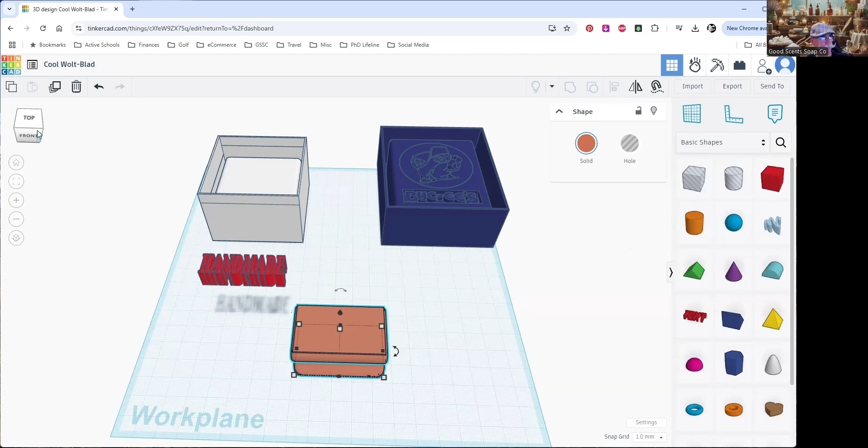So again, we're going to focus on soap stamp making today. So I'm going to start off with how do I make a soap stamp. I'm going to go ahead and share my screen through my Tinkercad application. And here, this is one of my soap stamp designs, and we're going to talk about others. But this is just a simple, kind of a handheld single piece soap stamp, with a flat bottom and top. We'll talk more about that here in just a minute.

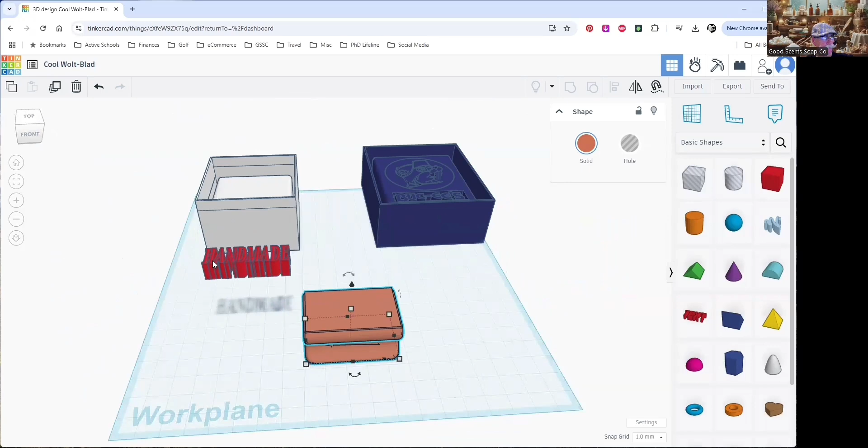But the one I'm going to make right now is one that I want to make for my own soaps. And what I'm going to do is I'm going to say handmade by Good Scents Soap Co. So we're going to make this a little smaller so that it will fit on the face of the soap, like so. And then we're going to have to make it a little smaller so that it will go down into the soap.

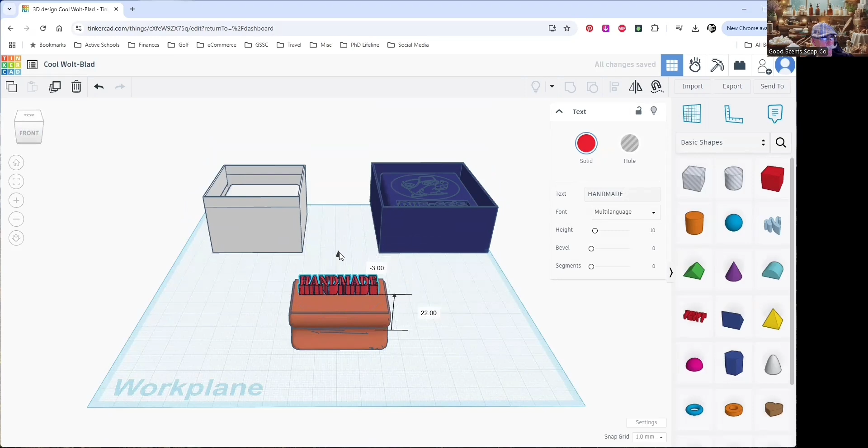So let's make that 5 millimeters. And then we're going to make it go down a bit into the soap, like that. That will leave about 3 millimeters above the soap for the stamp. It can be more than that, it can be less than that, but you want to make sure that it's the right height to be able to get into the soap. I'm going to move that up just a little bit. We'll fix that later. And then I'm going to replicate it.

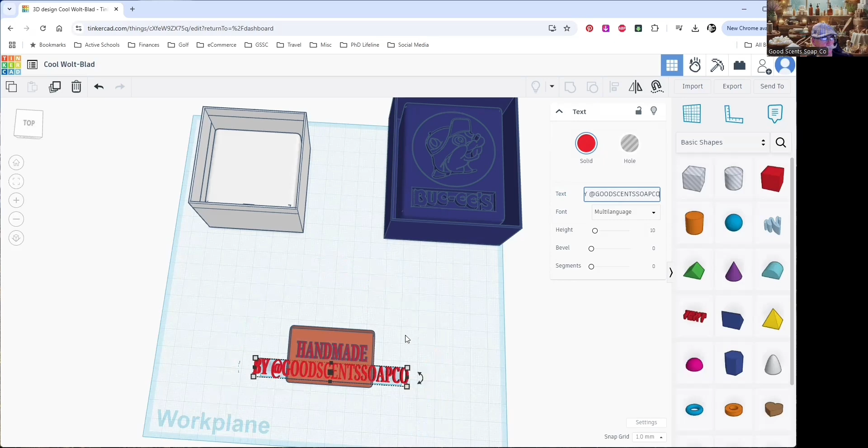So I'm going to do Control D, and it's going to give us a copy of it. I'm going to move that down like that. Then I'm going to go over here, and I'm going to say by. I'm going to use the @ sign. And this is where I'm not sure if it will all fit. So that's basically how you make the text. Now the question is, if I really make that small, is that going to be too small for soap making?

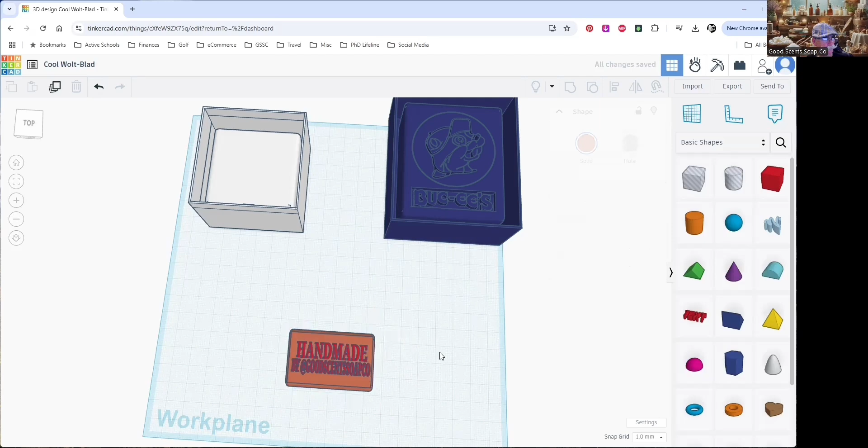That's basically how it is. I'm going to take the soap stamp out for now, and we're going to create a little space like that. And actually, I think if we get rid of that by, it will create more space. There we go. And maybe we can even make that a little bigger, like that.

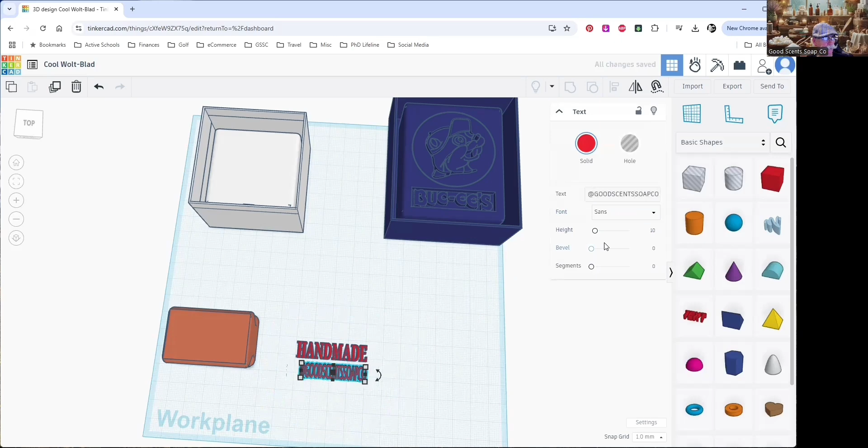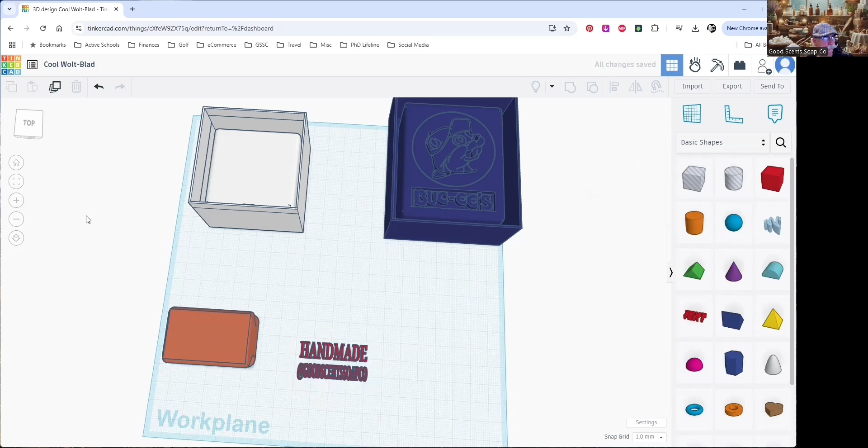The other thing that we can do is we can make these a different font. This is this multi-language font. I think if we make it a Sans Mono is a little compressed. Sans serif might be good. And then if we do this serif, I'm sorry. And then I can select both of those. I can center them together like that. Make sure that they're about at the same height, which they should be, yes.

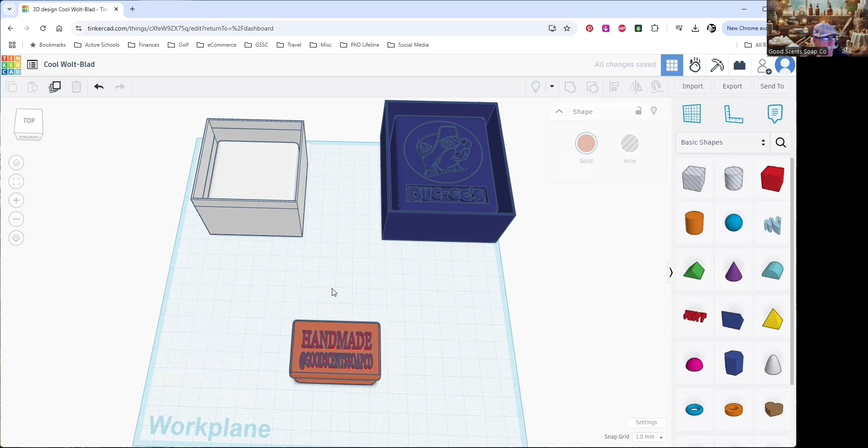Okay, then I can bring them back onto the stamp. And actually, let me do this first. I'm going to merge these. Then I'm going to bring them back onto the stamp. And then I'm going to pick them all, and then we're going to center it on the stamp like that. And then I can merge all of that. All right. So that looks pretty good, doesn't it? There's only one problem.

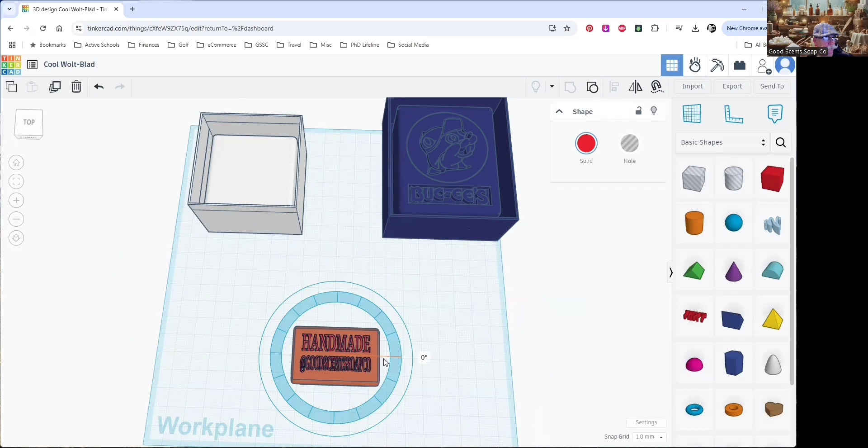There's only one problem, and that is that "handmade" needs to be reversed because we are stamping down. It's actually got to be the reverse of what it will be on the soap. So what we have to do there is flip it like that, 180 degrees. There we go.

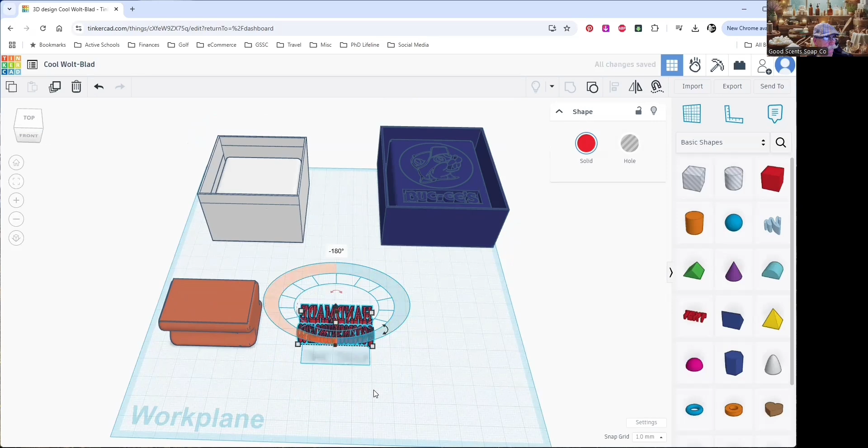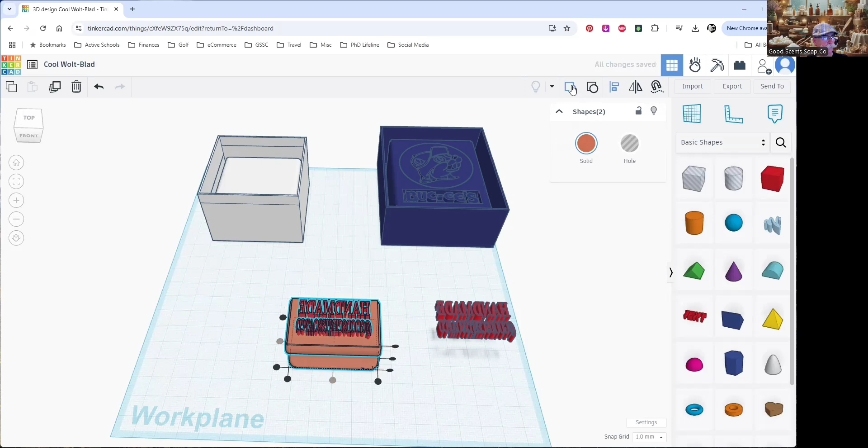And I'm going to copy this, and I'll show you why here in just a minute. We'll move this back. We'll recenter it. Align it. All right. And that's our soap stamp.

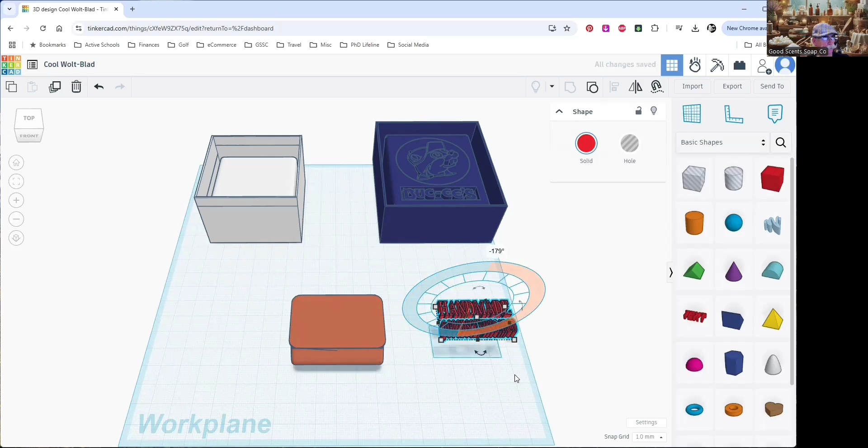So now what we can do is flip this around 180 degrees again. If you notice on a lot of stamps, they say what's on the stamp on the top of the stamp. So we're going to do the same thing. So let's move this over here. Move it up just a tad.

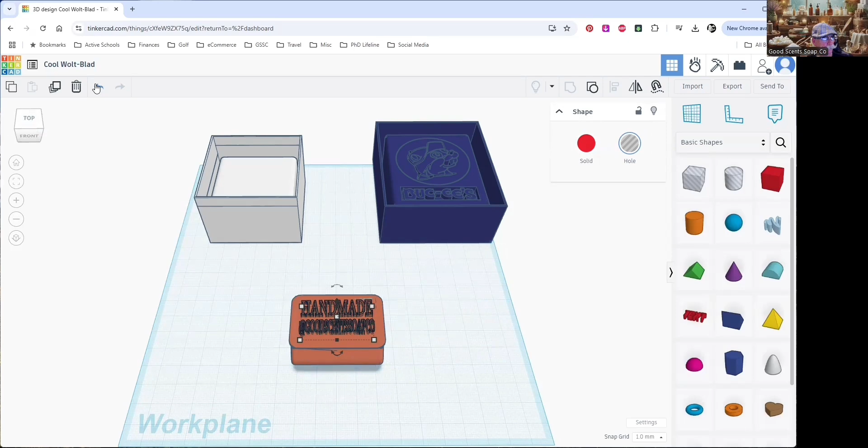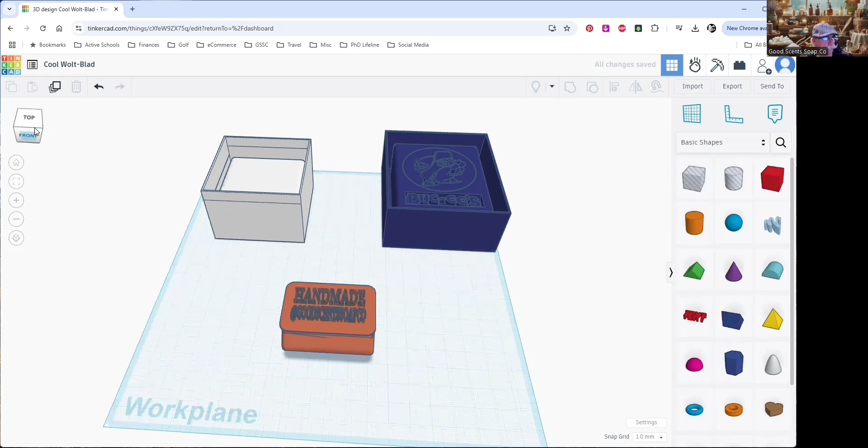And now what I'm going to do is make that a hole instead of a solid. Put it back here. Center them. And this time it's right side up so you can read them. And then rather than it being raised, we're going to lower it into the soap like that.

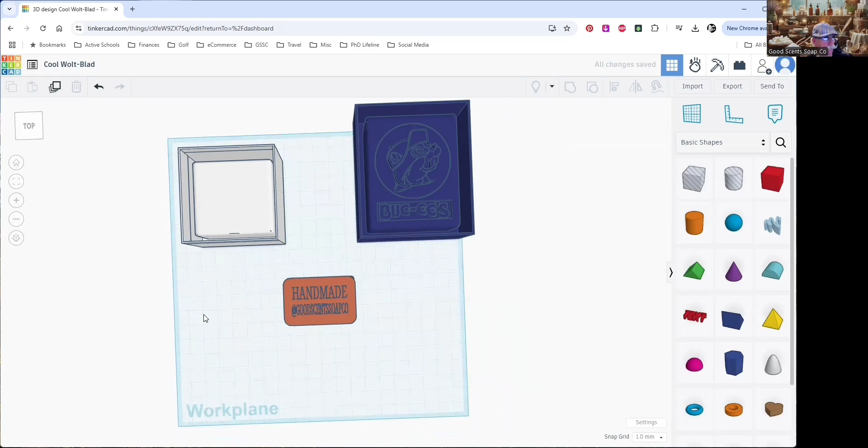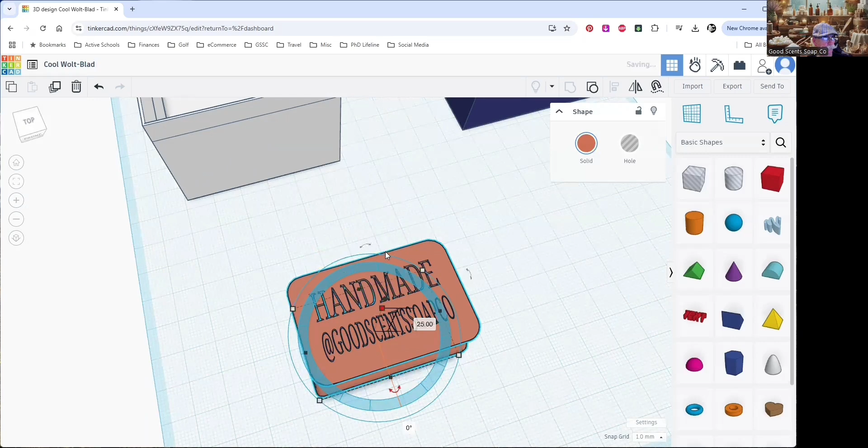Now when I combine them, for that to render, let's move this up a little bit, and then we'll zoom in. So what we have now is an embossed or engraved label of what the soap is. And then on the other side is the actual soap stamp.

Pretty cool, huh? So let's go ahead and save that as an STL file. We'll call it soap handmade. Save that. And then we're going to stop share.

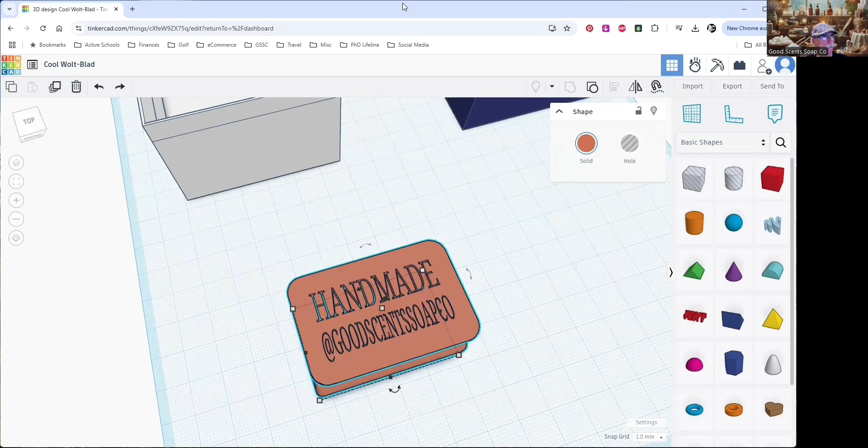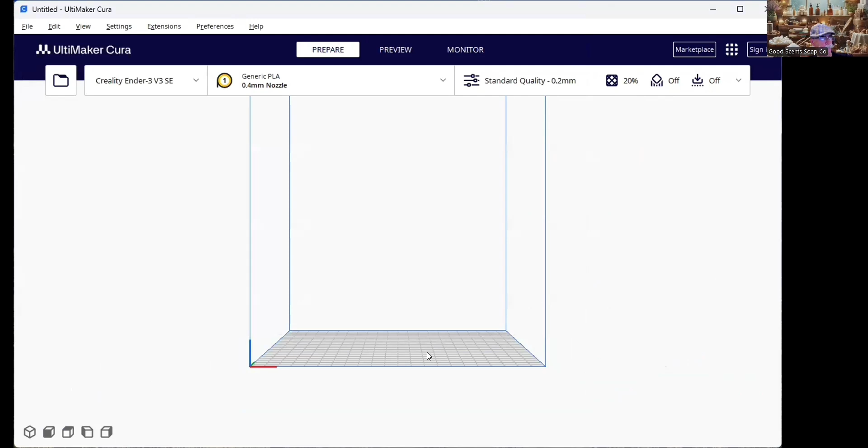And then the next step is to use another utility, which I'll now share, called Cura. So we're going to open that. Soap stamp handmade. And there it is. I'm going to move it up towards the front of the grid. You select the quality of print; because it's a soap stamp, I'm not needing as high of a quality of print.

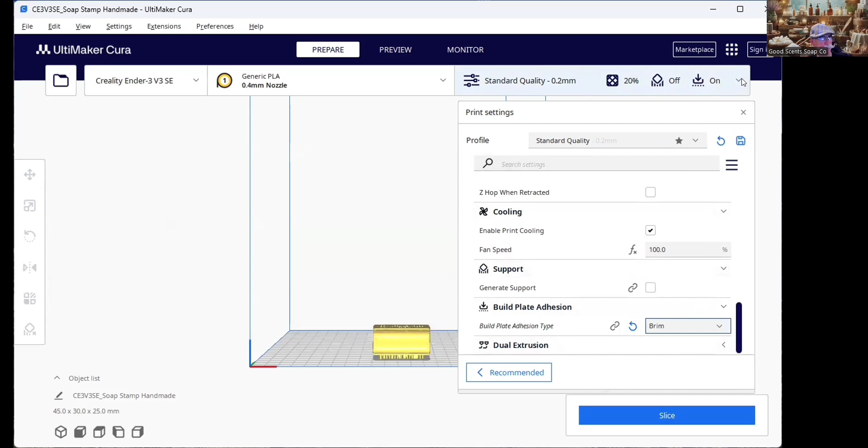But because it's a smaller object, I'm going to want a brim instead of a skirt. And I'm also going to want to flip this so that it's printing flat side down, and then it will do the raised part at the end. So let's see what that looks like.

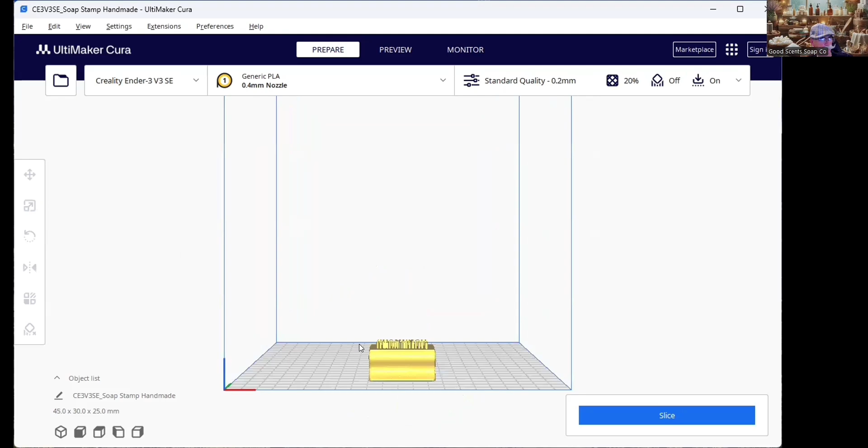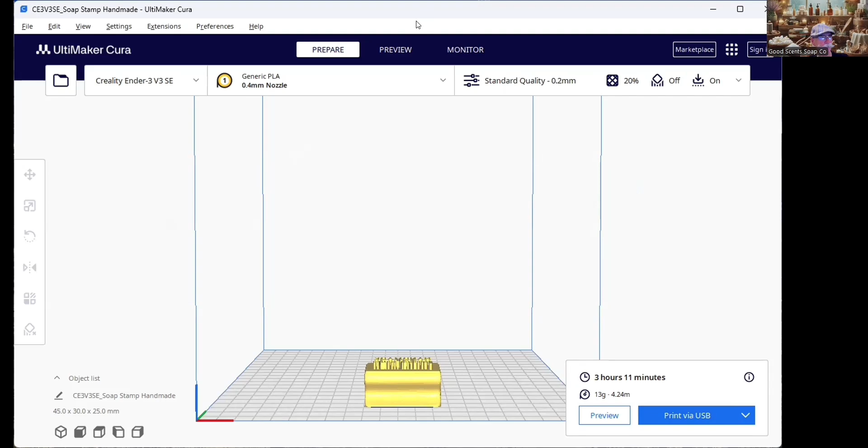So you can see this is a 3D rendered model for a 3D printer. That's what Cura does. So we're going to slice that. And we're going to print that via USB. And I'll be right back so that we can see the output.

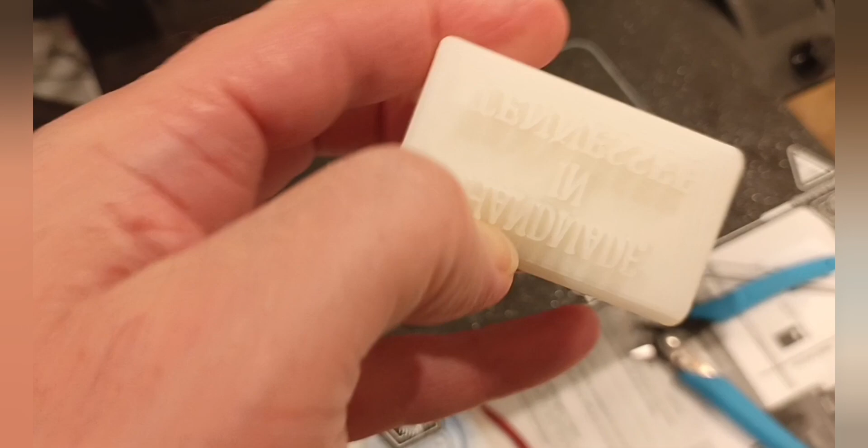So here's our handmade in Tennessee soap mold. All right, get it set up. There you go, in reverse. Let's go try it out on this bar of soap. This is just one that I had laying around, so we're going to go ahead and press that in.

All right, I did end up using a mallet, but look at that. Oh, that is awesome. I think I can use that on all my soaps.

So the next step is to create a silicone mold for the stamp that I'm then going to pour resin into and create a hard resin cast of the soap stamp that will make a fine addition to my collection. I love that. So what do you think? Stay tuned, and we'll be back with the next step, which is making the resin cast of this stamp.

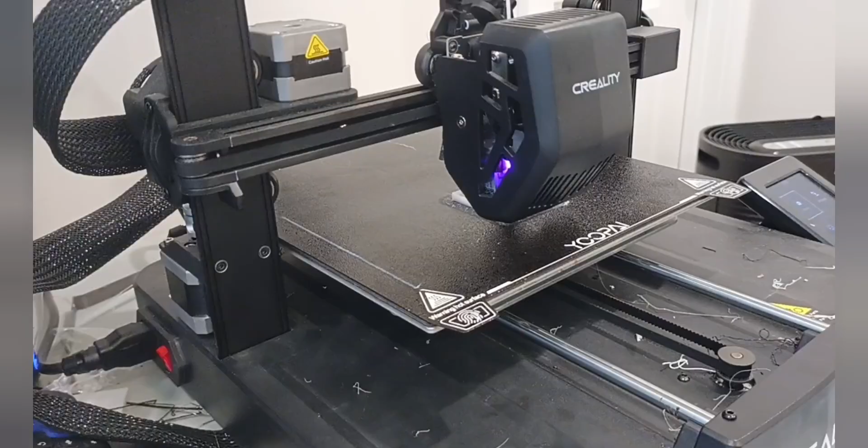So to do the resin model of the stamp, I decided to reprint the 3D model to pour the silicone from which the resin can be formed. So I'm reprinting the stamp with a box around it so I can pour the silicone. One other thing I'm doing is standing it on its end, which should also improve the quality of the print.

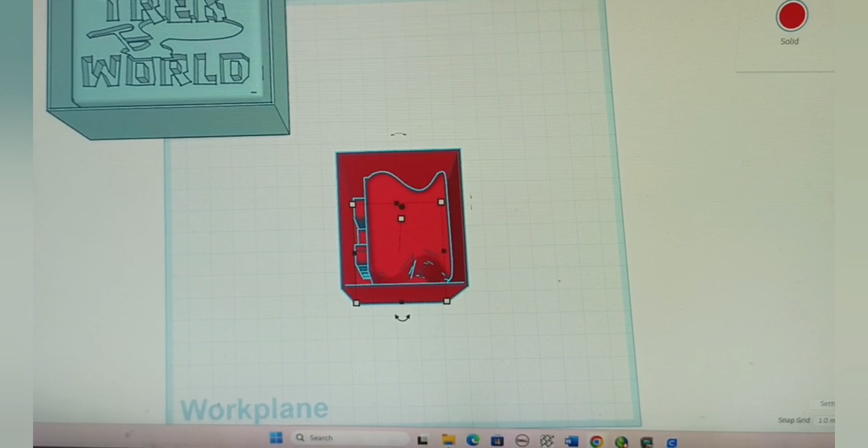So if I go over here, and now we're looking at it in Tinkercad, you can see that I've put a box around it and the stamp is standing on end. And then I save that, and now we have it in Cura for printing, and that's what we're doing right now. So looking forward to seeing this come out. We'll pour the silicone here in a few hours and get that firmed up so we can do the resin. Hang tight.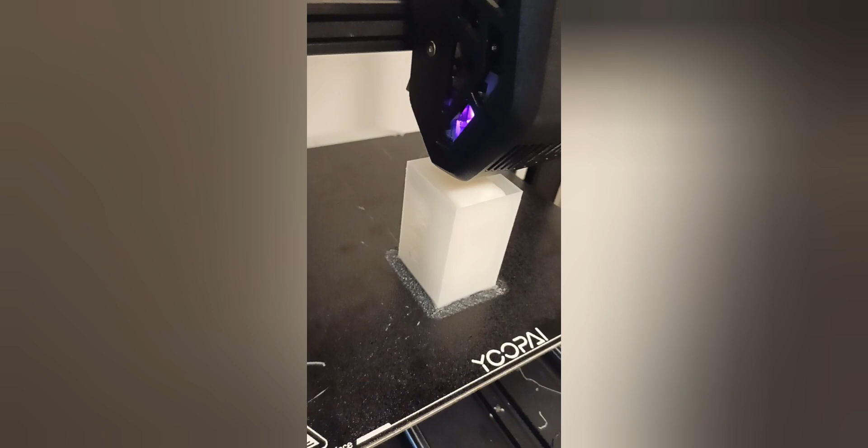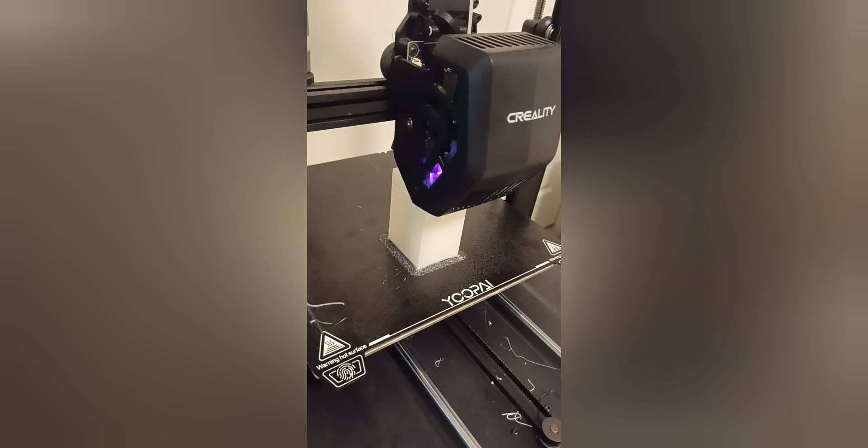So as this finishes up, you can see that we had a brim around the bottom. And what that does is it helps to stabilize it. Since this is a bit taller, we didn't want it collapsing, obviously, after 5 hours of printing. So this is just final stages of building the box, and then we're going to get ready to pour the silicone rubber to make the mold.

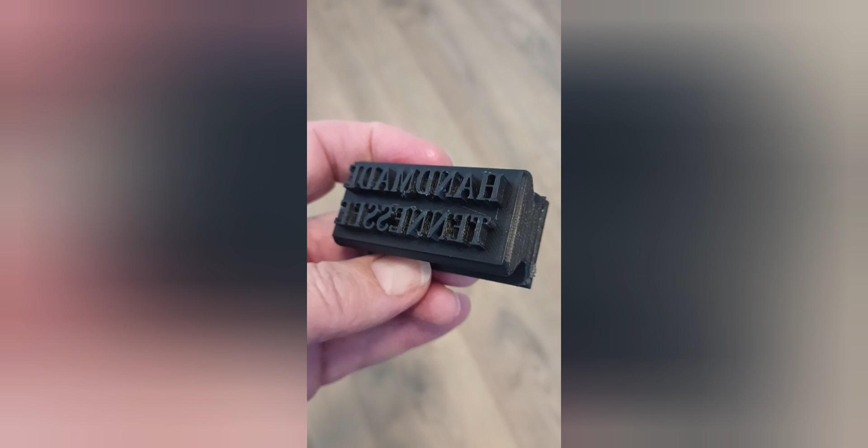So this is the stamp that I ended up going with, Handmade Tennessee. So you can see that the letters are nice and big and bold, and we have them on the stamp side with sufficient depth to be able to get them into the soap. And as you can see, they are reversed, so they stamp the right side, and nice and crisp and clear off the 3D printer. So I'm going to take this and put it in a silicone rubber mold, and then we're going to put resin in that and try to see if we can get a resin version of this stamp. So hang tight.

So here again is the stamp that we ended up with. Turned out really good, nice and sharp. And I've poured a mold for it. Believe it or not, that is a mold. And I have a slit in it to pour the resin, and that will keep it all intact. And so we're going to do that next.

So I'm going to go ahead and try to stamp this soap that I just made with Old Time Barbershop scent. It's an amazing scent. We're going to go ahead and stamp that. I'm going to spray it with isopropyl alcohol first, and then likely use my mallet to get a deep impression, and we'll be right back.